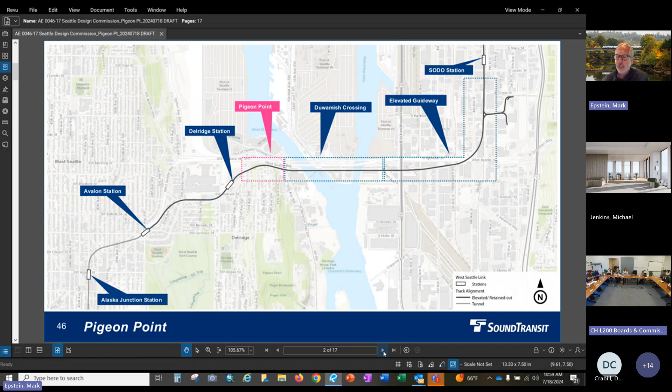There have been lots of meetings specific to Pigeon Point, with more to come with these groups. We realize it's an important section of the project to understand, with complex issues of culture, connections, ecology, and views, and we are taking the time to understand these issues as best we can.

So there is much evidence of a strong connection to the Greenbelt and neighborhood identity with Pigeon Point, including the community-built bust of Ralph Nesland, who has a colorful past.

So Pigeon Point is the north end of the West Duwamish Greenbelt. It has heavily canopied steep slopes, primarily deciduous trees with prevalent invasive species, particularly English ivy and Himalayan blackberry. It also provides animal habitat, including heron nest trees.

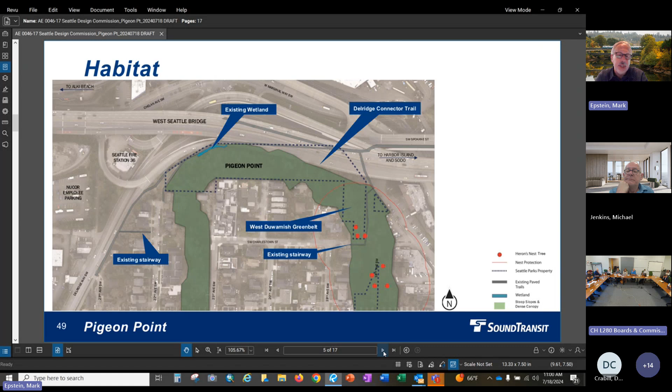We'll zoom in a little bit on the northeast section of Pigeon Point. The red dots on the map to the left are locations of heron nest trees. We've been monitoring the heron rookeries for the last 4 years, and we'll continue to do so throughout construction. A reminder that the blue dash line on this map outlines the Seattle Parks property. SDOT also owns portions of Pigeon Point. The red boundary you see on the map in the red cloud is a 197-foot buffer established around the nesting trees.

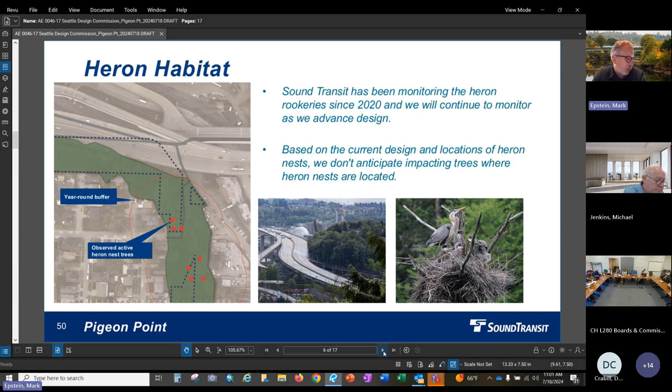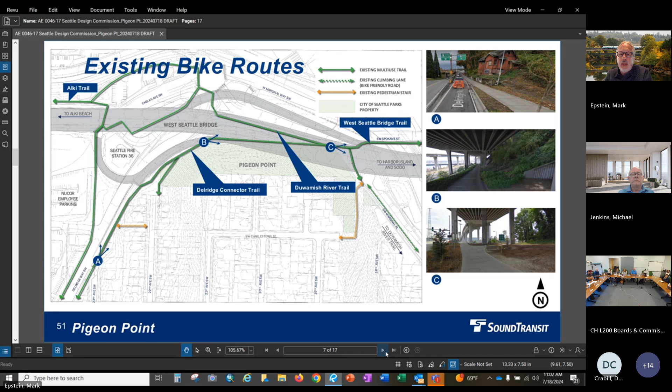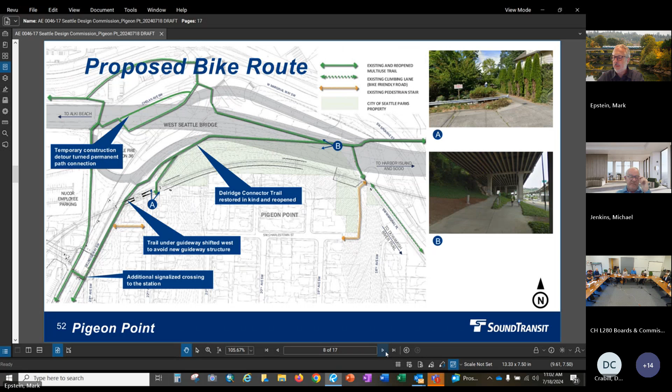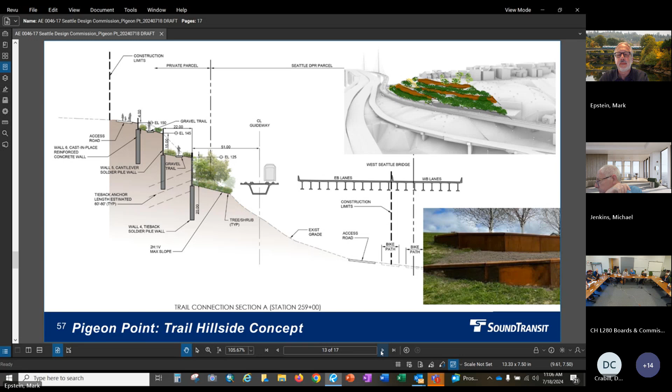It shows sort of more forest — the 2 gravel paths that would be part of that snaking trail down the hillside, and more forest restoration on the lower slope. The photo on the bottom right is an example of retaining walls using Cor-Ten steel, which is used a lot lately because it rusts to a nice neutral color and doesn't need much maintenance. But of course materials have not yet been selected. The loose sketch on the top right illustrates the overlapping terrace concept.

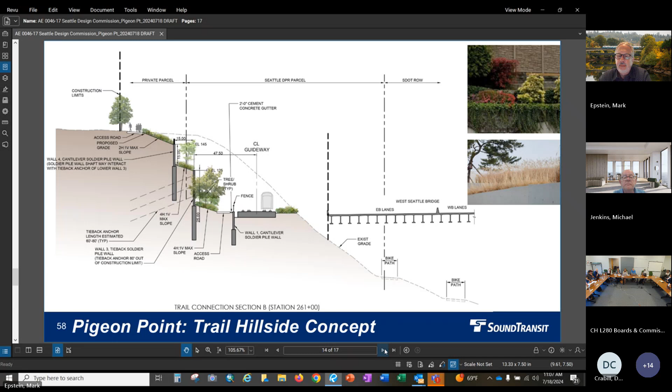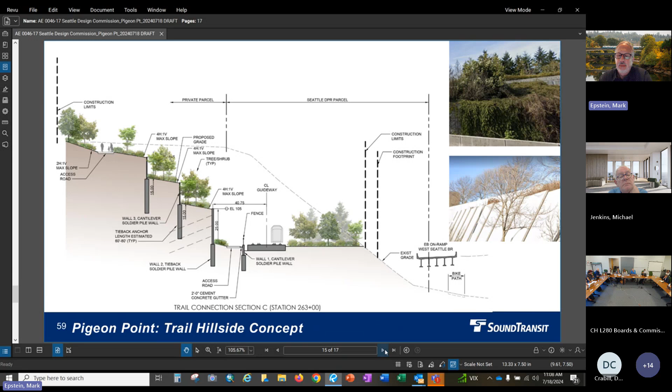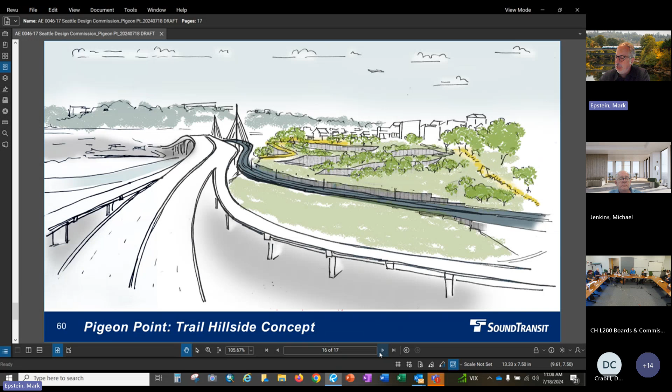Here's another look at that preliminary sketch illustrating the potential trail hillside concept. And with that, this concludes this part of the presentation — we invite your comments and questions.

Okay, so Molly, you've got a list of categories you're going to ask for input. Absolutely, so this will be the questions round, remember. Those will be questions directly to the presenters, and we'll do comments afterwards in conversation with each other. The first one for questions is going to be around aesthetics.

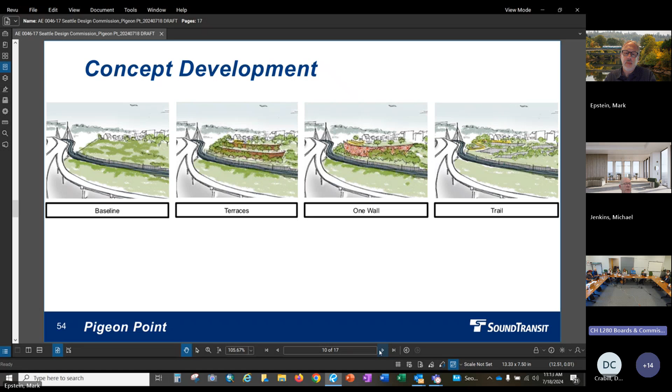Oh, okay. Yeah, so this is one combination of terraces and trails that you're showing us, correct. But it's very, very preliminary and there's more work to be done. And I would say there's a significant amount of engineering involved in this—an unstable, large hillside is no small feat to retain.

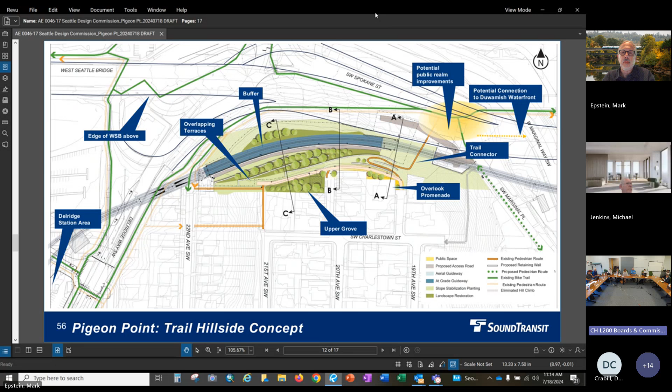Is it unstable? Well, we've done a global stability analysis, so we wouldn't put our trains here if we didn't have the confidence that we can put it there. But once you start making terracing, that's a different global stability than if you just had that baseline slope, because now locally you may have instability and so forth.

So it's complex, going to require complex analyses, and there's probably multiple ways to solve that problem, leading to different solutions in terms of the terracing. But that's a bit of a process. We would, like we've done with the bridge, come to subcommittee and show progress to try to get feedback.

This site is, in addition to being part of that, a potential and known slide area along the corridor. There are multiple regulations in play from the environmentally critical areas ordinance. Whatever work is done here will have to achieve complete stabilization both during construction and in final design. That's what they're alluding to, that they've studied that with a baseline, but they need to do that work with a terrace option, and the city would need to participate in that to confirm it can be permitted.

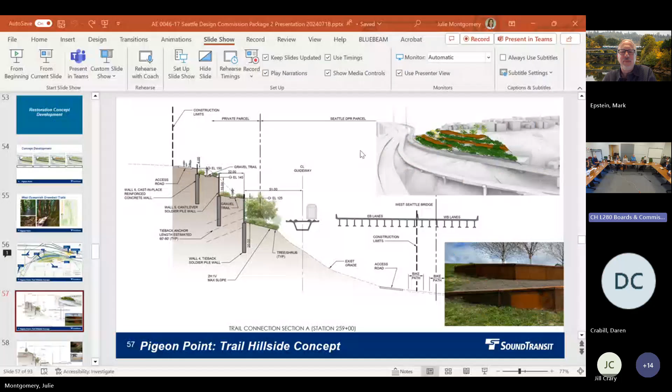Just where the person is. Yeah, you can kind of see it. Want me to share it? Yeah, I have to go back and forth if you want to. Yeah, share it. I got it. I'm on it, thank you. Then, yeah, usually when you've got it up, if someone can show us an estimate of how close the nearest house or structure is to that dotted line.

Okay, so it doesn't see, I don't see the hillside carved away there at all, so it's just barely carved away on those terraces on that one. Okay, yeah, on this one.

Right, but if you go back to the section, can you guess, do you think? I think it's gonna be off the page a bit. Okay, yeah, and then let's just keep doing that for B and C too. Okay, all right, so we'll go, whoops. Okay, and Julie, when you say structure, these are all residential structures? I believe so, yeah, that's a residential structure up there. That's helpful.

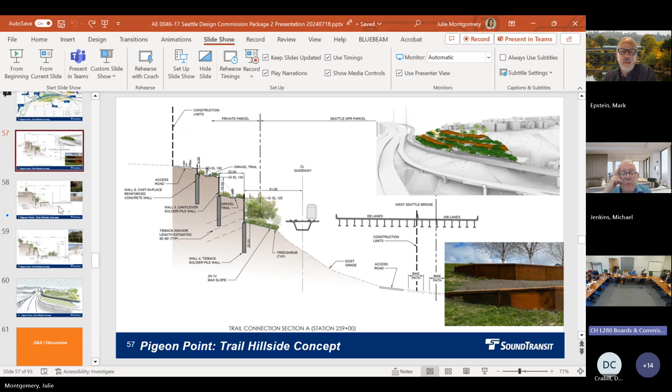Okay, and then so section B, here's our cut and the construction limits line. And then we'll jump back to the plan and B. Looks like there's a terrace, and the top thing, but these little ones are the houses that remain. So in your section, you have an area that's called private parcel, and that is your land take.

Yeah, right, that would be the property, but... Right, so if you go back to section B, this is what Brian's talking about, that there's something labeled private property, but it's probably not still private property when you build this. That's right, correct. Oh, so the first house is probably, it might be, that house is close enough it might be on the page still. Well, there's one that's taken there as well. There's a removed. Yes.

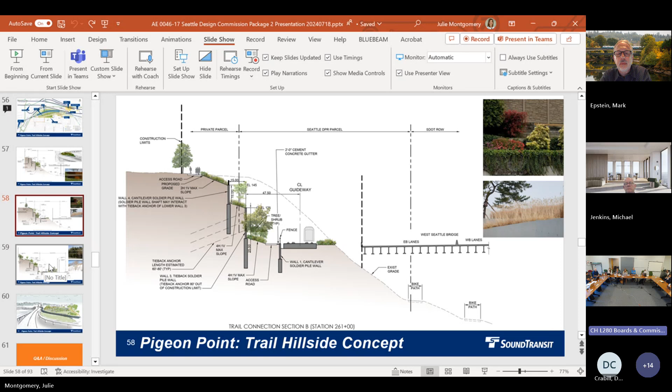Okay, and then by the third one, it looked like to the section that it's pretty open. And then going back to the plan, section C, yeah, there's enough property. That didn't. Properties that, yeah, get impacted by that.

Which I have some questions about that. Okay, that sounds great. Okay, are we comfortable on aesthetics? We're going to move to questions about circulation. We got aesthetic circulation - what are those? Aesthetics, circulation, alternative preference, sustainability, outreach and equity, and special information needed for 30%. Are we okay on aesthetics?

Can I ask one aesthetic thing that we didn't touch? Go ahead. This is where the long span bridge meets the ground essentially, right? And we had a previous conversation this morning about how those two interface structures work. I think we probably have that same comment here. Yeah, I think that's a good question. Let's see the transition from the bridge to the not-bridge.

And is that a 30%? Is that a question for the team from what we're looking at today? I think it's just as it evolves. Well, isn't it a question too, is it visible? Great question. Are you asking the question?

Yeah, with the long span bridge in here. There's a long span on between the needle, the cable stay and the slab - the slab, is that blue? This blue, yeah. Yeah, slab on grade.

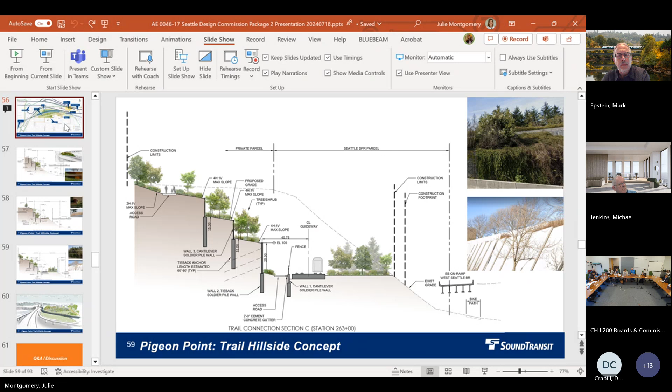Yeah, I think that's what you're asking. I think it's consistent with the previous comment, that we're leaving behind slivers—is there a good way to not do that, or is there a better use of that sliver? But I don't think that's a question, more a discussion. So Dirk just gave us the answer to my question—okay, you should move on, great, and we can discuss it.

My only other comment, circulation related, is at the intersection of the potential trail connection and the bike route, there are potential public realm improvements—has there been any specific thinking about what that would entail?

No, because it really does depend—the engineering will help inform what can happen in there. I think we see it as an opportunity. How it manifests once we dig into the design more will help define it. Okay, thank you, that's why it's kind of fuzzy. Great—can we look forward and expand on it? Looking closer at that in the 30% design. Yeah, I'll raise my hand then.

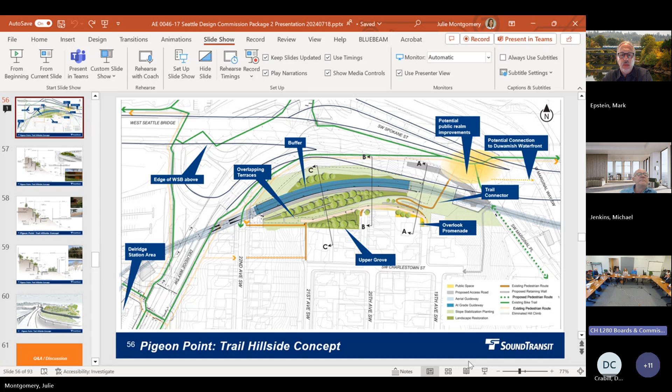I did not hear any conditions on that, so we'll only be looking at recommendations.

I do want to say that there's a lot of support for some of the aspects of the design that include the choice of the terracing and the trail if trail is possible. There's a lot of support for the reforestation component and naturalization, the emphasis on that regreening and reforestation over other aesthetic components.

Other things we're particularly excited about? There are quite a few. Okay, so then I'll go into recommendations. So recommendations were around aesthetics.

Again, support for the terraces and trail, reforestation support, a desire to look at a family of guideway columns and the transitions, looking at that all the way from the SODO station to where it engages with Pigeon Point, and to separately look at the guideway structures and columns associated with Delridge and up to Avalon as their own component. For those to tell a cohesive story as a cohesive family that transitions in a cohesive way as the design team moves forward.

You might want to call out including the connection of the west side to the Delridge station, from Pigeon Point. Yes, so the crossover to the Delridge station from Pigeon Point, because it serves as a gateway to Delridge, and that is also something we're particularly interested in reviewing alongside the Delridge station.